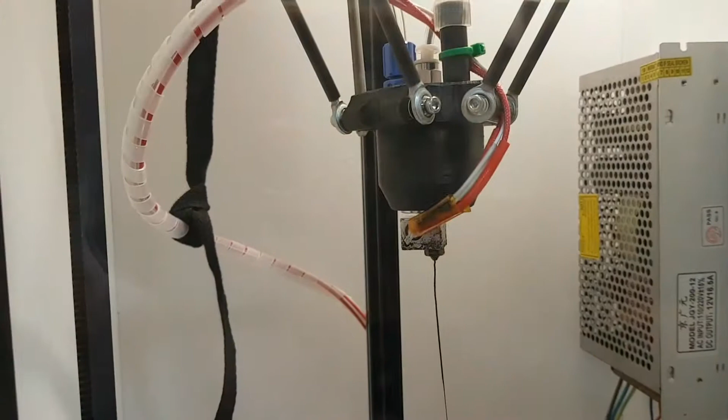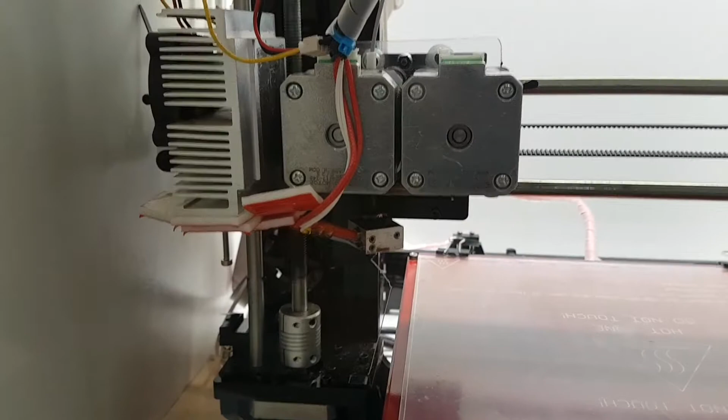G'day, Michael here. I found myself with the fact that I have the Delta printer, which has one set of characteristics for the print head, and my smaller Prusa, which has a different characteristic for the print heads, and of course the Black Widow, which is a big Prusa style printer, and it has its own set of characteristics. I found that the profile management in Slic3r is a little bit too simple.

Let's just get Slic3r running. Now, with any of these Linux desktop environments, you have the ability to set up multiple desktops. And this one I'm running has about eight desktops. Now I'm just going to go to a clear one. You can see where the mouse pointer is. Click on that, and that gives me a clear desktop. So I'm just going to launch Slic3r. Now I'm logged in here as the user Michael.

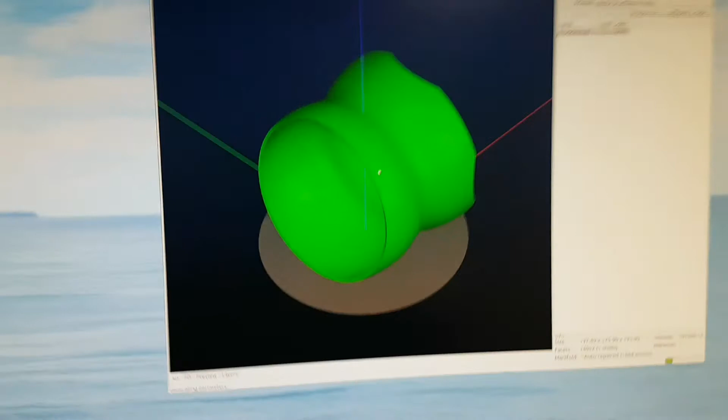If I want to add a part, let's just grab one. It really doesn't matter what I'm doing. That'll do. Okay, so we've got a part here, and I can choose which printer I have. I have multiple printer profiles. Let's say I pick the Tevo with a 0.8mm tip. That sounds all well and good. I'm waiting for it to change.

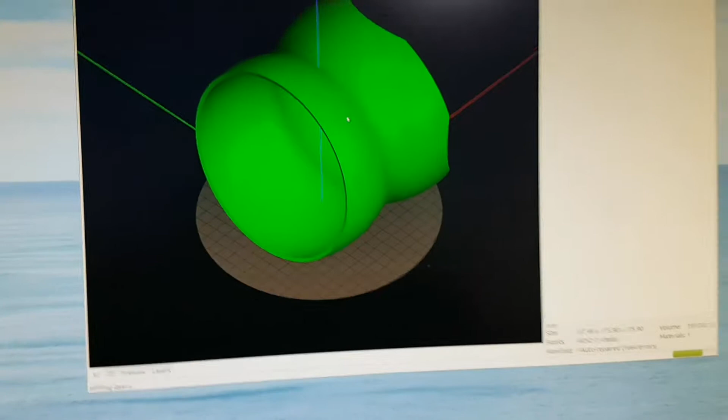But I also found I have to, oops, sorry. Gee, I'm trying not to shake here, but it's just not working.

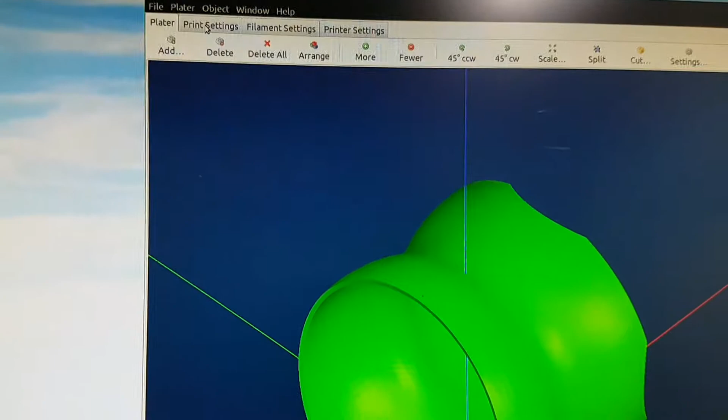Okay, so I've got here the printer settings. I find that using the filament settings, I have to also have the printer setting kind of with it. To just simply choose ABS or PLA or whatever, I end up with too many variations. Like in the printer settings here, just listen to it, it's busy doing infill. Okay, so I end up with this massive list of profiles to cope with both the different materials and the different characteristics of the print head.

And because I'm printing such a varied type of product, one minute I'm producing something that needs to be quite high in tensile strength, so it has to be quite solid. The next part has to just basically occupy a space, so it doesn't really matter if it's very empty, and doesn't matter how fragile it is. And the next part might have to have a kind of knock resistance, but otherwise lightweight. So for the different structures you need, you end up with another profile as well.

So, for argument's sake, here I've got ABS precise for ducting. The ducting didn't use an infill. I have nothing but perimeters to make up the ducting components, because you don't really want to infill a circular tube. You want to just have it nicely printed. So everything's optimized for not only the printer and the material, but also for how the product works.

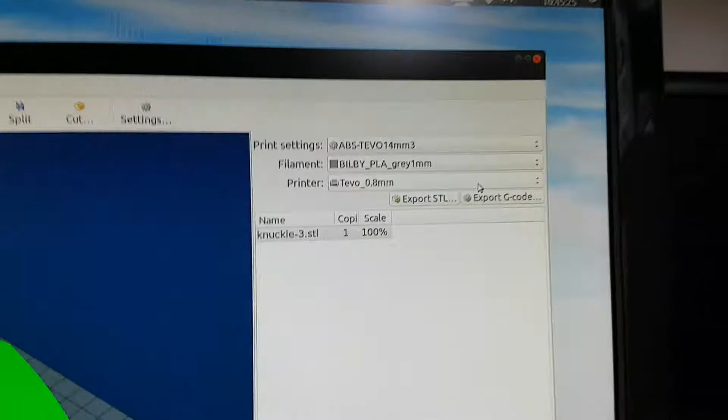So I found this really mind-boggling, and I was prone to picking the wrong parameters when I went to the plater. It seems like a good idea. I pick which profile, and so forth, and that seems to be a logical way of doing it. I can't criticize this method, but I found that, if nothing else, I was making too many mistakes. So what I've come up with is a method using the talents of my operating system, which is Linux. I have to zoom out a long way to get the 4K monitor in.

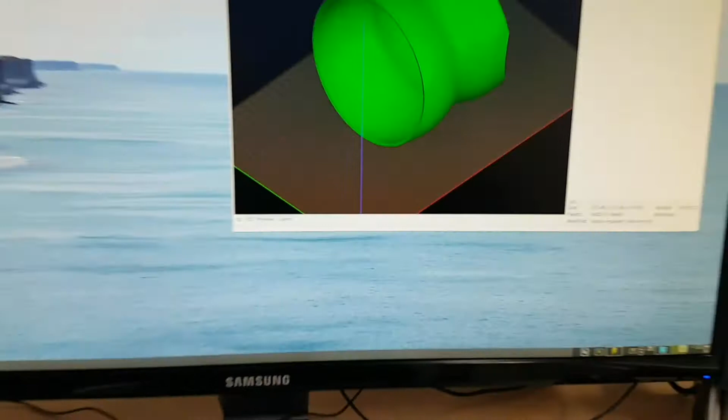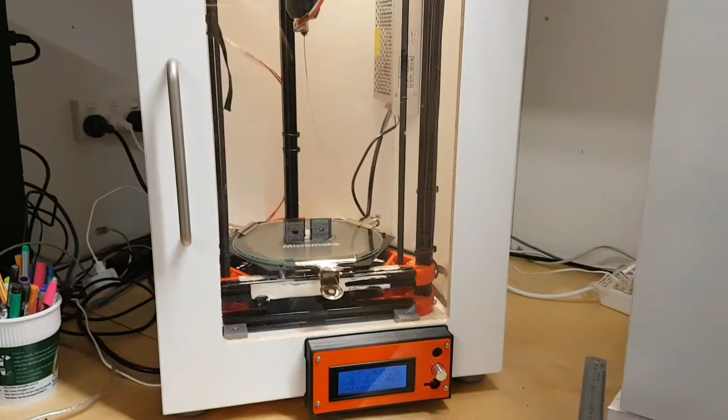I'm using Linux with the MATE desktop, M-A-T-E, and the tools I'm using are pretty universal across the different desktop environments. Linux lets you use many different desktop environments, but they all have this functionality where you can choose multiple desktops, at least all that I've come across, and I've tried about 20. Also, Linux is fundamentally multi-user, like any decent Unix environment. So what I did was set up users. I've called them Delta, Prusa, and Geeetech. So they're my three names.

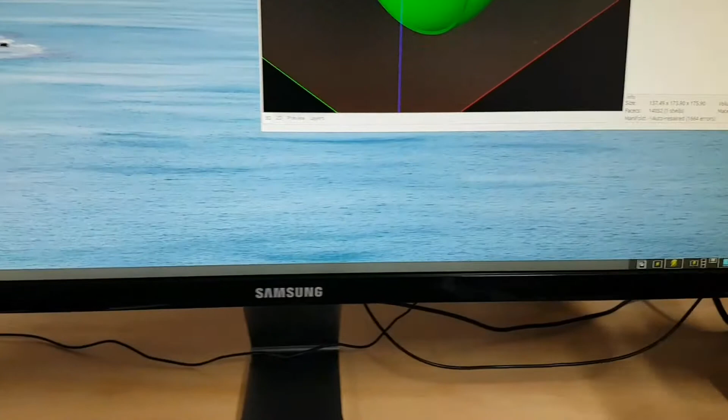And what I've done, right now, this one's what I call the Delta. I've got the SD card out of there, in my card reader. And coming into here, my first desktop, which I'll click on, is set up with my social media and basically internet business, then my email. So this first desktop's got my internet and email.

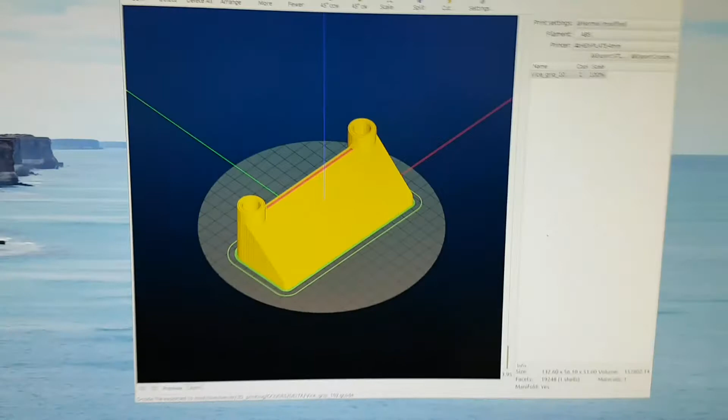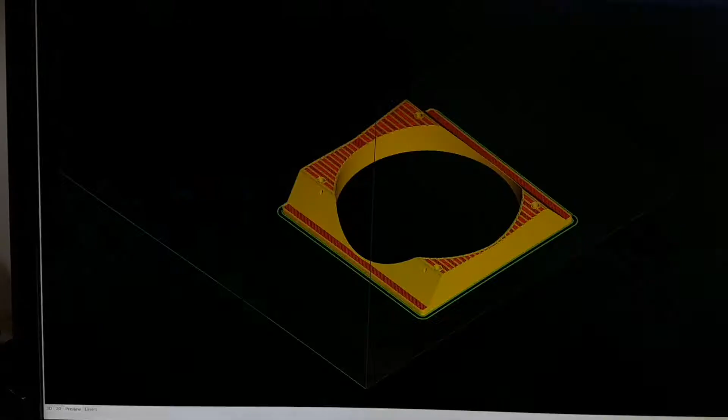The next one I've got Slicer running as the user Delta. So the user Delta has got Slicer running, and that's the file that it's working on. Now on the next desktop, click on that, I have Slicer running as the user Geeetech. I'll just go to the plater so you can see what I'm up to. Okay, and that's the piece that's in the machine right now. You can see the print bed.

Okay. Now on the next desktop, I have Slicer running as Prusa with a different design. Now let's say I want to export that file to G-code. Now Linux, I'm finding I haven't.

Maybe there's a way of getting around this, but I haven't got there. The user Michael has got permissions to use the USB storage device, right? But the other users somehow, for whatever reason, aren't able to use it. Maybe there's something I'm missing. In any case, I'm leaving that in the too hard basket for the moment.

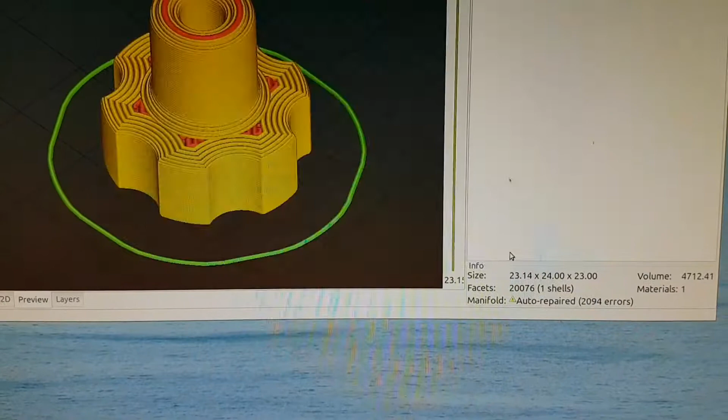But what I've got here, Slicer defaults to saving files to where you read it from. But what we can do is set up Slicer to do something different. So I'll go File, Preferences. Now, what's important is set this as expert mode and remember output directory. That's how I've set it, but I haven't actually exported a file, so I'll do that now.

And I've set up in the 3D printing folder a folder called G-codes. Now I'm using this as a user Prusa, right? So its output folder is going to be this desktop. There's no file saved here at this moment, so this will be my first file. Now with that setting, remember output folder, every time, regardless of where I get a file from, it's going to be putting it to that output folder.

Now let's go to the next desktop. We're on number 4. I'll go to number 5. And what I've got this desktop set up as is basically my file manager. So here you can see, Michael Desktop Server 3D Printing G-Codes Delta. So this folder is showing me the output folder for the user Delta.

This one here is showing the output folder for the user Geeetech. And this one here is showing me the Prusa. Now because it's a network drive, I'll just do a refresh. And there's our nut.gcode we just saved. Okay.

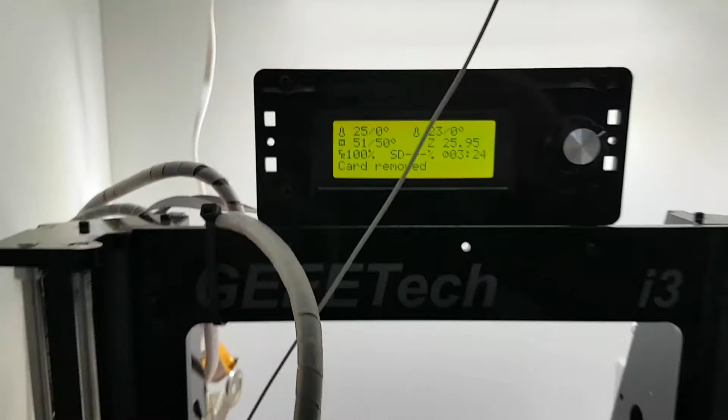Take the SD card out of my Prusa. Now I'm not sure whether I formatted this one, but I guess I'll find out. If I haven't, I'll do it in front of you. Okay, SD card's in. That's still labelled as a Nikon D60. So I'm going to use Applications, Accessories, Disks. Now, it's the 16 gigabyte device. So I'll click on that.

I'll format the partition. All I really care about is making a name there. So I'm going to call this one, caps lock, P-R-U-S-A. Format. Yep, let's do that. It'll take a few seconds to do its thing. And there it's appeared. So now I've got that SD card labelled Prusa. It doesn't matter if you're using Windows, it does the same sort of thing with formatting.

Now I'm using this whole window for file management. So now I can see the Prusa is the device I'm looking at. Right? So I'll grab that nut G-code and drop it onto Prusa. Eject. Oops, there we go. Up here it should say that it's safe now. It normally does. Oh, didn't do that. In any case, it's ejected. Alright, so I'll get that.

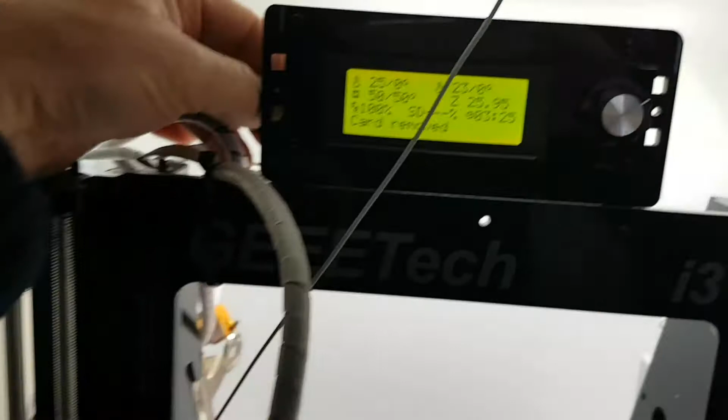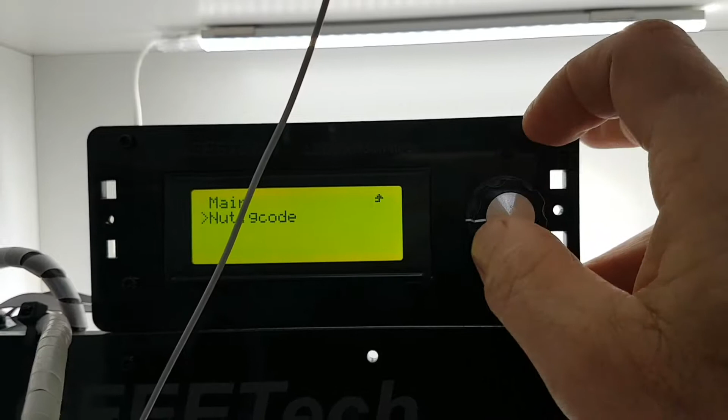I'm probably shaking you like mad, so forgive me for that. But it's the concept. So I'll put that in the card reader. And hey presto, we should be able to print from SD card. Oops, wrong way. And there you have it, nut.gcode. I'm not going to run that right now, but there it is, it's in the machine.

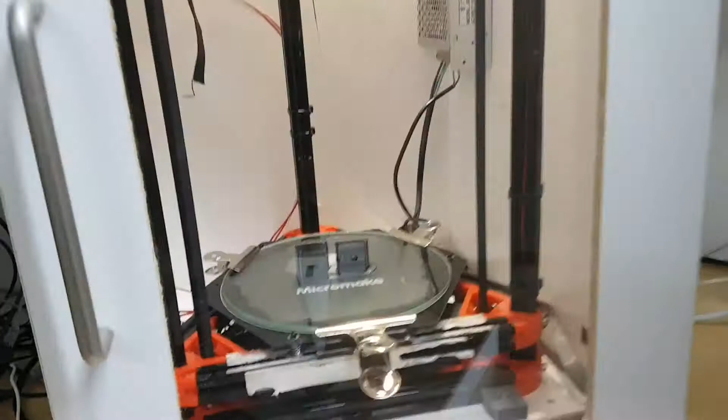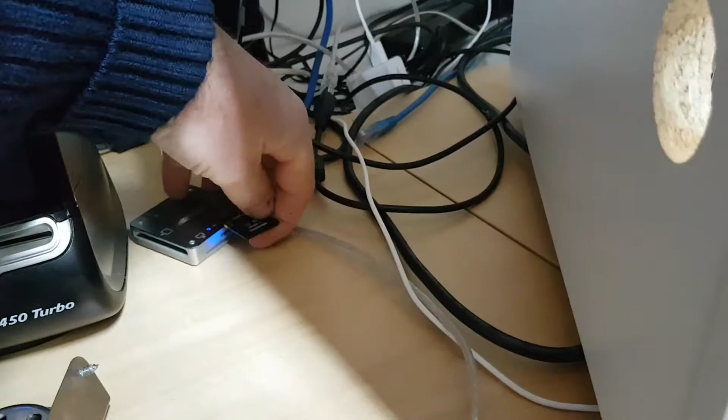Okay, so going back to the Delta, which I only managed to get online today. I'm going to grab that card out of the Delta. Same process. Very hard to do this one-handed. Okay, so I've got the card back in there. So what have I got in the Delta? The Delta folder has not got the file I'm looking for, so I'll go to the desktop that had the Delta on it. That's the first one. Okay, now I've got this part.

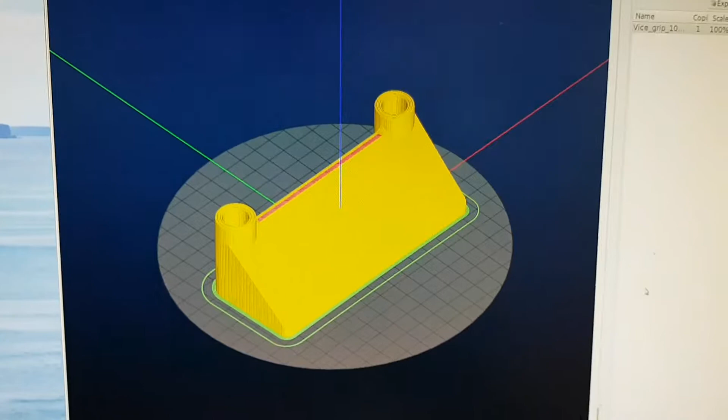Now I'm the user Delta. Linux can have like 200 users on at the same time, all running software, so it's quite a nice little setup. In another video I'll show how this is done, but I just want to show the concept. So as the user Delta, I'll export the G-code, and I'll just go save. And it's remembered that I am aiming to save it to the Delta folder. It's got an older version, I'll replace that, that's fine.

Now I'll go to that desktop where I'm doing the file management. Where's my Delta? Up here, so I'll just do a refresh. We've got the vice grip. Oh, I've just clicked on that, and my Python script has just given me an estimate. That estimate includes a warm-up time allowance of about 10 minutes. Okay, so I'll just go to my Delta SD card, drag and drop. Okay.

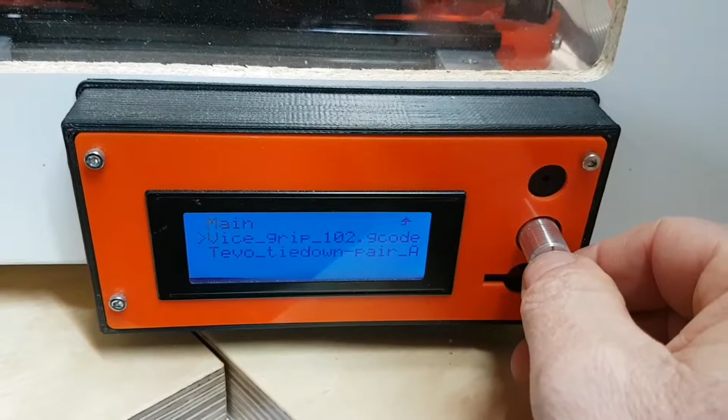Okay, so that's been ejected. Okay, so the SD card's in there. Print from SD. There it is, Vice grip 102. Oh, I better stop that, it's going to collide.

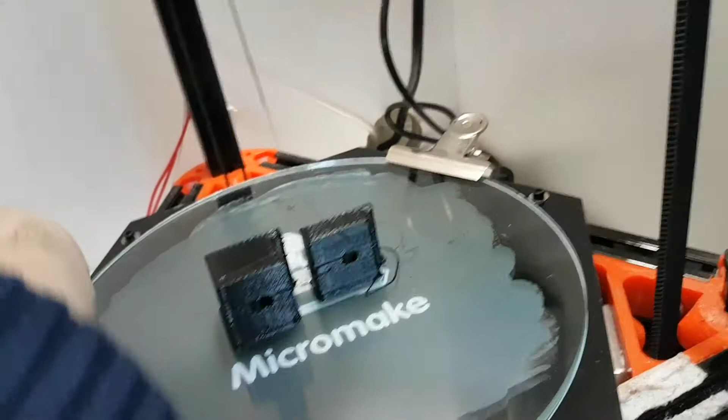Now I have these glass plates. As soon as this glass plate comes out, it'll cool down pretty quickly. So as this cools down, those parts will come loose. I've just got to get another plate, give me a second.

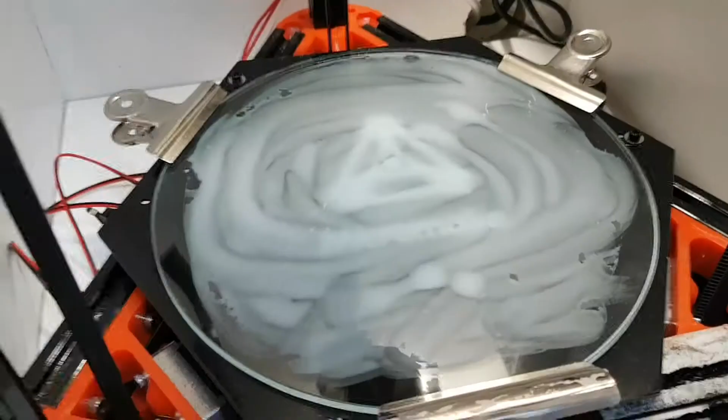Now I've just put my 20% cross-link PVA slurry. As that dries, it tends to separate a little bit, but it gets to a point where it is much more spreadable, and it dries so thin that it almost leaves no texture whatsoever on the product.

And I can reuse the cross-link PVA for many prints, and this is an ABS filament, I'm hoping I can print this part, which is about 130 across and quite high. I'm hoping I can just print that here without too much fuss. It's just about coming to the point where I can spread it around a little bit better, but it seems to be behaving quite nicely anyway.

I might actually just leave that to heat. What often happens if there's a small trace of oil, you get these little areas where it pulls away. So I'll see what happens there. In any case, I better just check that my settings were in fact correct for the ABS on this area.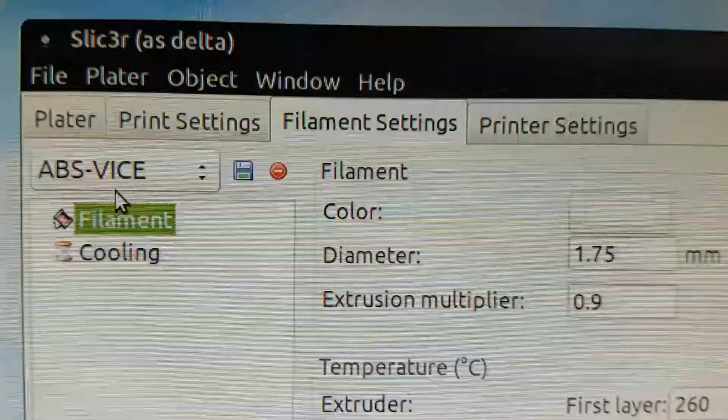So I go to the Delta one, and all I'm concerned about is the filament settings. Yeah, that should be acceptable for this lot. I could bump up that heat a bit higher, or maybe I should. Yeah, I'll bring that up to 100. Okay, now what I could do is save it, and if it's related to a particular part, I might just call that vice. So printing this particular part, I've got an ABS setting and vice, but all the printer related settings have remained constant.

Now this one here is, what have I got here? Oh yes, I was fiddling with that, and I'm happy with that as my basing. I'm still moving into this setup, so I'm still finding my feet a little bit. I just call it normal, that'll do fine. Okay. Just about, no, it's still liquid. I'll get some heat into it.

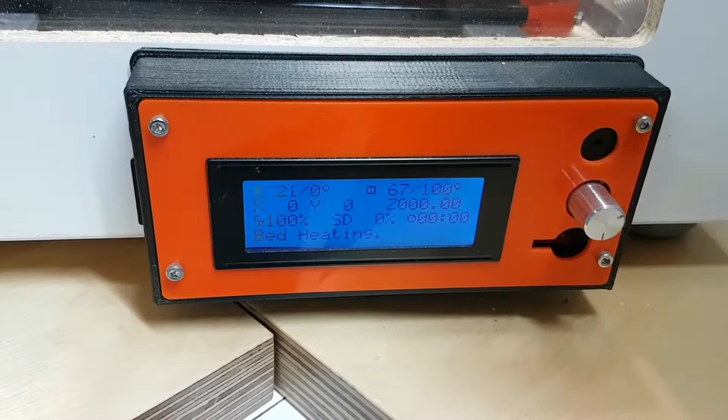Okay, so while I paused the video, I actually changed that temperature, as you remember, in the slicer. Of course, saved it, got it onto the SD card. It's been running for a couple of minutes just to heat up. So it's heading for 100 degrees like I just set, and it's at about the 66 degree mark. Unfortunately, it takes a while to get the thing heated up to the 100 degree mark, so I have to just wait. I'll come back to this shortly.

In any case, that other part that I took out, the plate's cooled and the ABS is broken away nicely. You get the reflection right, and you can see it's quite a smooth surface there. Must have been a bit of a dag underneath there, something there for some reason. Alright, anyhow, the underside's smooth, the edges are printed quite well.

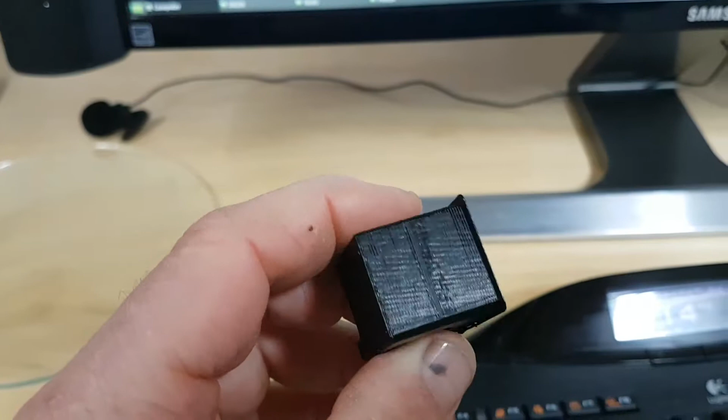Now, I had a friend here, and when I was printing this I showed off. The first, well, about 10mm, you can see a change in the finish there. Some of that's to do with that hole, but it's already printing in the order of, I think, about 60mm a second, maybe even 80mm a second, and that was at the 100% feed rate. And just showing off, I wound the speed right up to 244%, so that would be getting close to 200mm a second on this small part. And it really produced almost no quality loss.

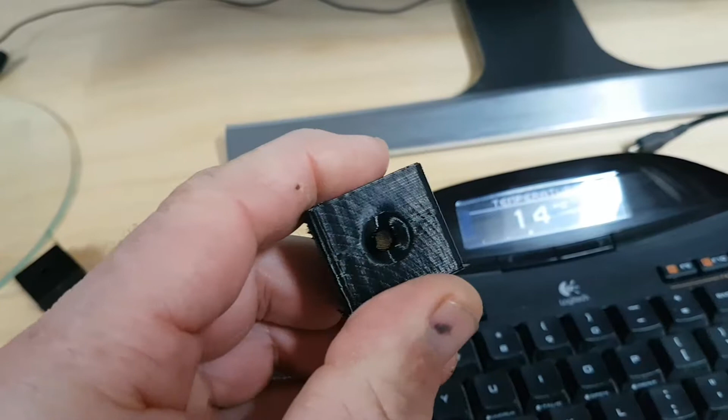It started getting to a point where the filament was changing a little bit. So if you look at that, and this is only a small part, so it really does show up. You can see how there's a small finish change, but it's not like, oh my god, it's just wrecked. You can see the finish change there. And that's basically it. It pretty much conformed to the shape, even at the crazy high speed.

So the Delta, for motion wise, it's such an impressive printer. Considering I went from about 60mm a second to getting close to 200mm a second, there's almost no quality change. It's madly impressive. And that hole's pretty circular. Let's see if I can get vision through it. That hole's pretty nice and circular, if I can hold it right. In any case, adequate for what I'm doing.

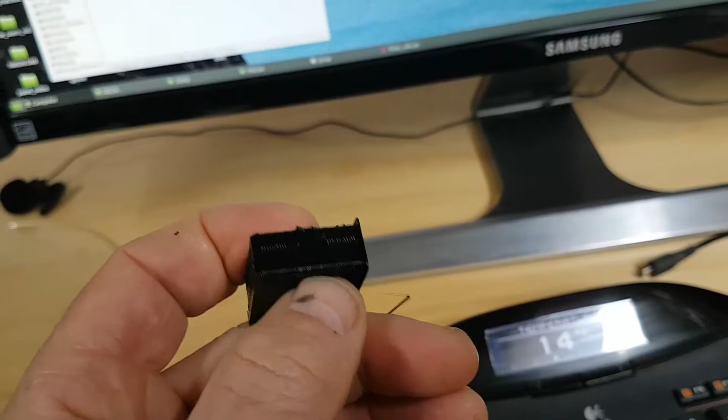And its partner, of course, had the same speed change. Now, I'm not sure where that bit of fur is actually from, the fact there's a hole there. I think it was probably a string left over from jumping between parts at that layer, because the speed actually didn't affect the other side, so interesting. Alright, so as you can see, it's a tiny part, but done at a crazy speed, it's still printed well, so it's quite impressive.

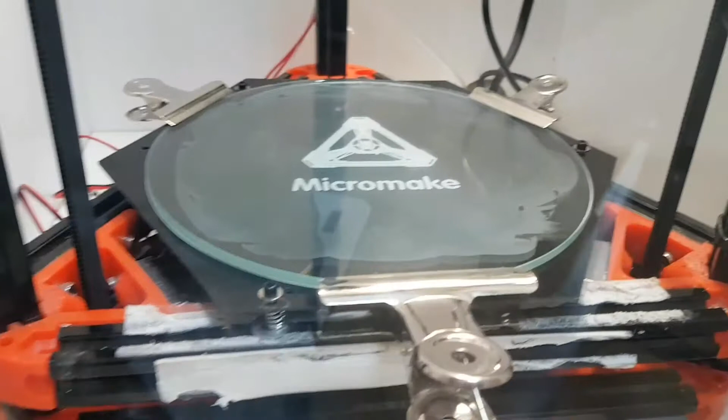Alright, now you saw the glue going on that glass plate. I have 3 glass plates, all at various stages. This is one I have to basically clean the coating off and recoat, but it's okay for doing little prints that I don't care about too much. That one's got a good coating on it. As you can see, it's near invisible, and that one's waiting to be heated. 100 degrees is a bit of a slow target, so I just have to wait and let it be.

In any case, what this video is really about for the moment is showing how I'm managing multiple printers in a way that I don't get confused. All I have to remember is the SD card, which is labelled by the printer name. Everything's saving on a directory on the server to its own folder for each printer, and we've got the printer name here.

I've set up users on the system. I'll just go to users and groups. Make the window bigger. Okay, so you can see here I've got Delta, Michael, Prusa and Tevo as users. Now the way to execute a program as another user, so I don't have to log out and log back in again to use the other programs. All I need to do is run a program called gksu.

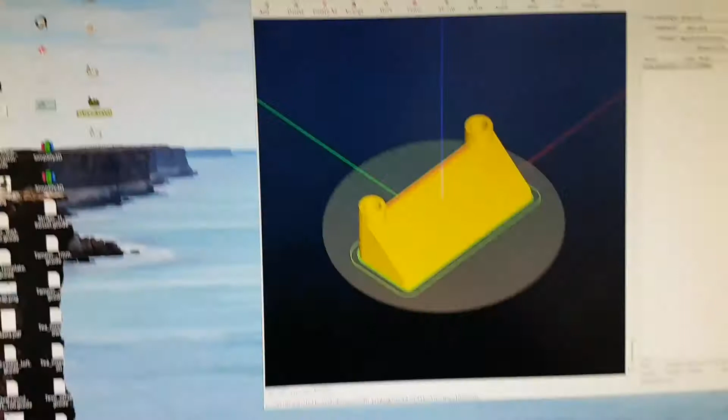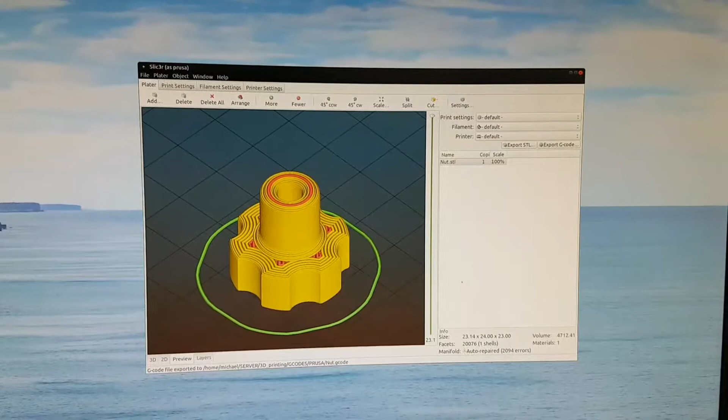Okay, so by using the machine as a completely different user, all my settings are completely unique for each user, and that's how I'm simplifying the use of the slicer. I'll close that. So each one of these slicers: this one is the user Delta, this one is the user Tevo, and this one is the user Prusa. It's shown here that we're using it as Prusa instead of as Michael, who I'm logged in as. So I'm simultaneously using this as 4 different users, so the slicer is set up for each printer as a completely different user. In effect it's like having a separate computer for each printer, so the configuration is very simple and clean to follow.

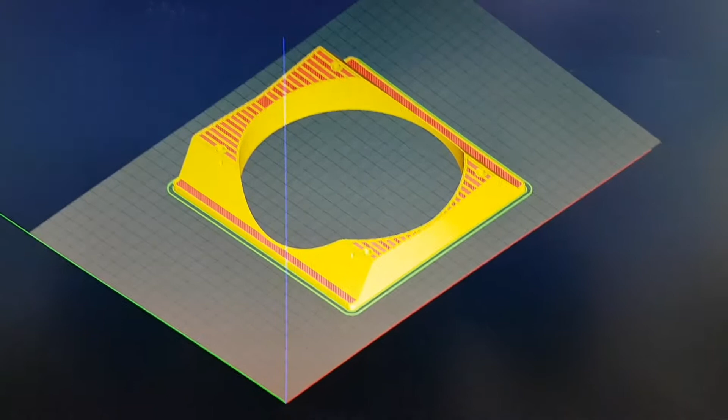Here I haven't really set up anything, so everything's just default. But let's go to Tevo. What settings do I have here? I've got very few settings because I don't need them. What I'll end up with is a couple of different filament settings, a couple of different density settings, and a couple of different design related settings. So probably about 9 different parameters for Tevo, and about the same for the other 2 printers. So it'll be a manageable number, whereas trying to run everything from one slicer was growing exponentially in complexity, and sure enough I'd be forgetting things.